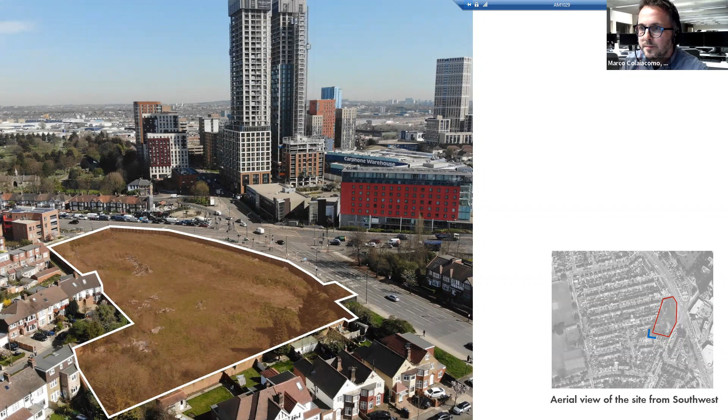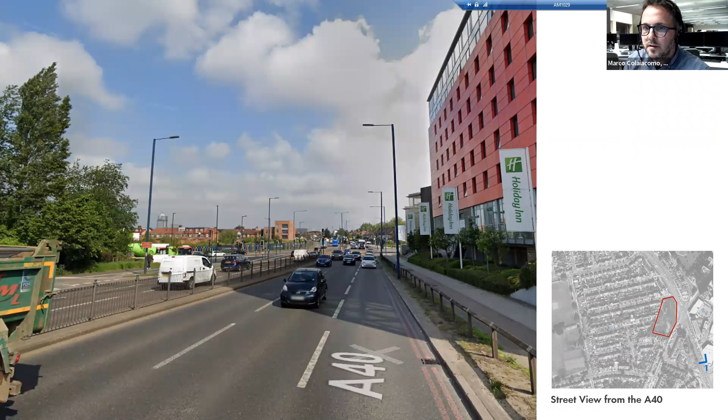We've been quite a few times outside, and those are just some shots that we took when we were on site, to see just how different the character is, and the fact that we sit between two completely different areas with different characters, and we need to address both of them. So this is a picture from the A40.

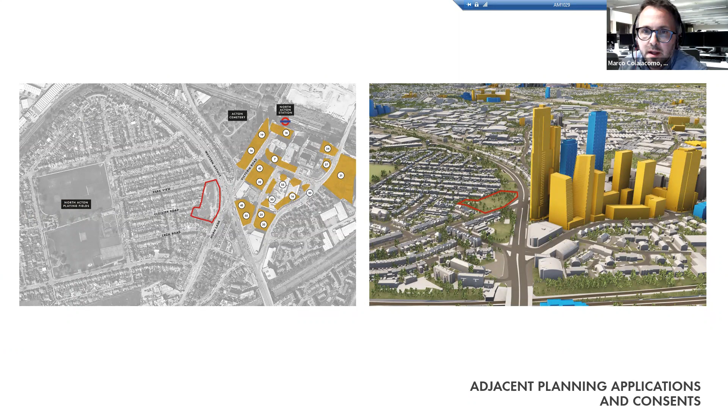And this is the existing consent, which actually is still valid. Do you want to add something, Rachel, on the existing?

Yeah, it's probably worth saying, I'm sure most of you are aware there have been a couple of schemes approved on the site. The first originally included a mixed-use development, some of which was a hotel and some residential. That wasn't delivered due to a covenant on the site which restricts commercial uses, so it wasn't deliverable.

The more recent approval was for 149 dwellings over 9 stories, including a basement car park with 90 car parking spaces. Again, unfortunately that wasn't deliverable, purely due to the fact that it's not a viable scheme with the inclusion of a basement as well.

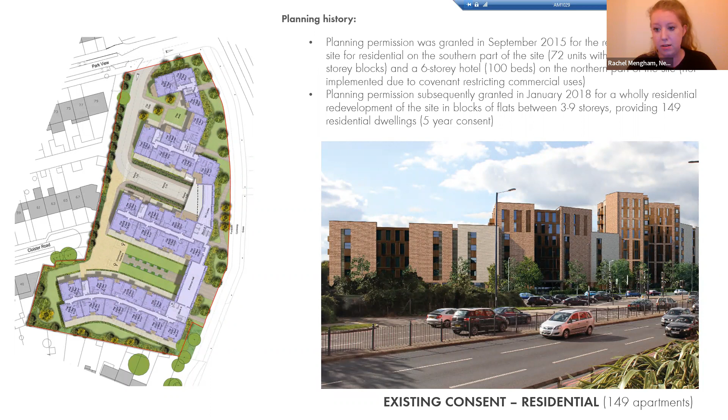Okay, thanks. So going back to our key principles - they are mainly developing affordable homes for Ealing, which are needed, but also reconnecting the area with the context, which we think in terms of urban design is always better - connecting rather than excluding.

And creating a buffer - the development will create a buffer between the A40 and the neighbors, so we can have a look at the positive impact of the proposal.

And then obviously having a look at sustainability targets, which are a must nowadays, and also this is linked with the architecture and the massing of the proposal.

And again, here we are going more into the detail of the proposal. So we are talking about approximately 290 units, 35% of which will be affordable.

We had a look at how we can better maximize the site, taking care of the context and linking it with the wider area, not just the immediate context, and also providing additional public space, which we know in this area there is quite a lack of. This proposal is adding approximately 1,000 square meters of public space in the heart of the scheme.

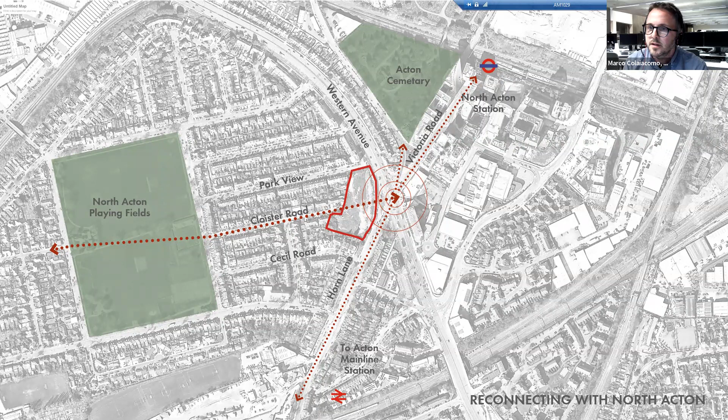This was the first idea that came to mind, and I think we need to take the big picture of the site, not just the close context. We also analyzed the major green infrastructure, which is part of the benefit of the scheme, and we are trying to improve this.

Zooming in more into the ground floor and how those spaces are working, you can see on the right hand side a diagram showing the two private courtyards and the public link in the west with the North Acton playing fields, but also with the development on the eastern side.

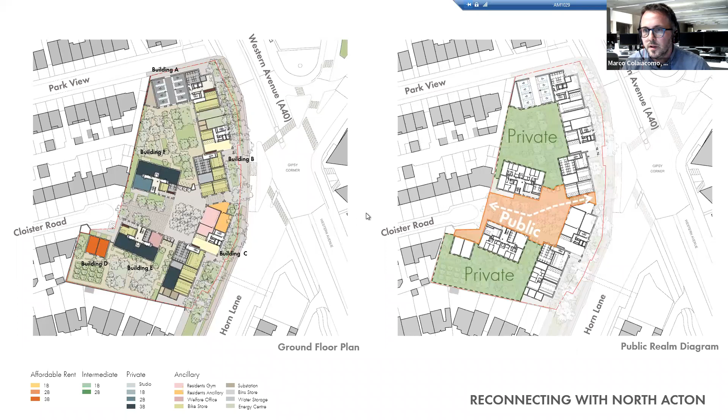Yes, this is a picture of how the link has been imagined at the moment. It's a double height space with a residential ancillary space on the left hand side, and this is a view from the A40, from the green corridor, looking inside the proposed scheme.

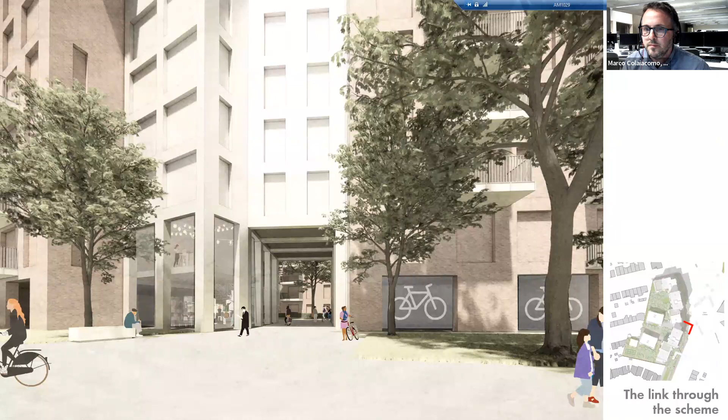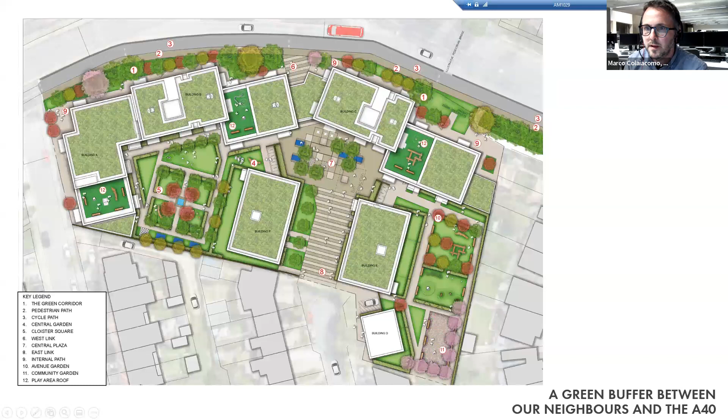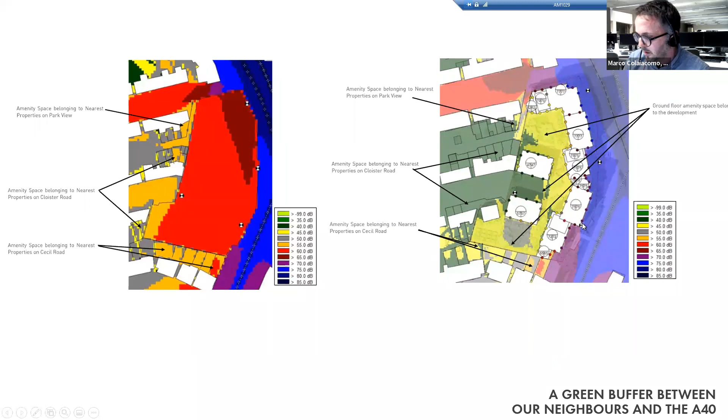On the right hand side, you can see the new diagram with the proposal inserted in the context, and the majority of the noise is going to be absorbed by the building along the A40. So this is one of the major benefits. Another benefit is having a green buffer between the noisy road on Horn Lane and Western Avenue and the new development, which will benefit all the people passing through the area.

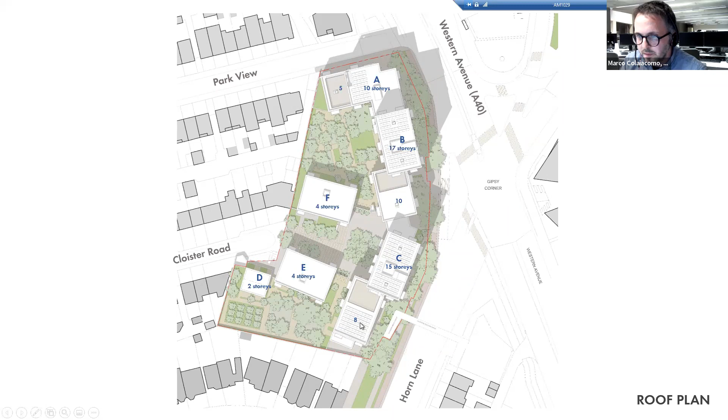In terms of massing, the proposal needs to consider both ends of the site. On the western side, we are stepping down the massing to 2 stories and 4 stories in block E and F, and then we raise up the massing in the center of the scheme, starting from 5 to 10 in block A, 17 to 10 in block B, and 15, dropping down to 8 in block C.

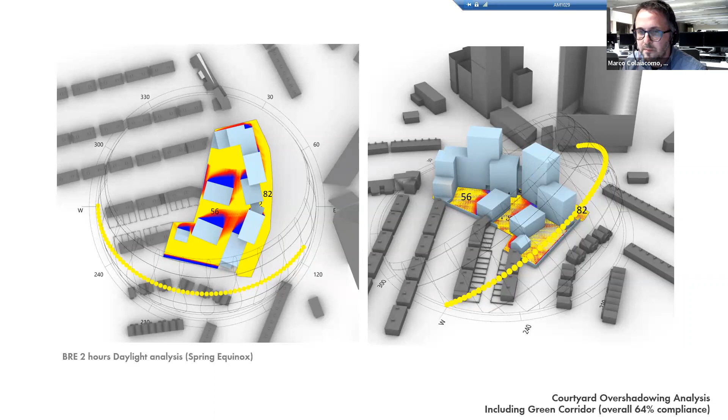This is the delivery and parking strategy as we have envisaged so far. The majority of it will be on Park View. We have 8 parking spaces undercroft, and there is a delivery bay which will serve block A and then B. We will have another parking and delivery bay on Cloister Road, which will serve the rest of the blocks - block E, F, C, and those 2 terrace houses on block D.

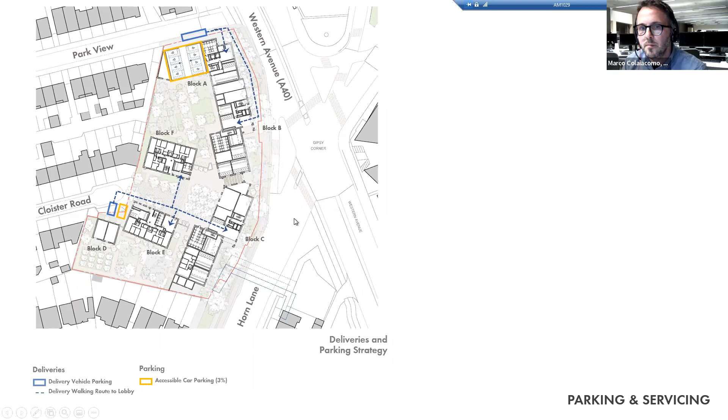I think just to, yeah, I don't know if Sam, you want to.

Yeah, sure. So this slide basically covers what many of you know already. We've been holding public consultation events, and this is our last public consultation event for the moment. We've been holding in-person events on Saturday and Wednesday over the last week, which some of you have already attended. Once these events are complete and we've received feedback throughout March on our website, the team will review all the feedback in April, and then we're aiming to submit a planning application in May. You can see our contact details and website there, which I've already mentioned.